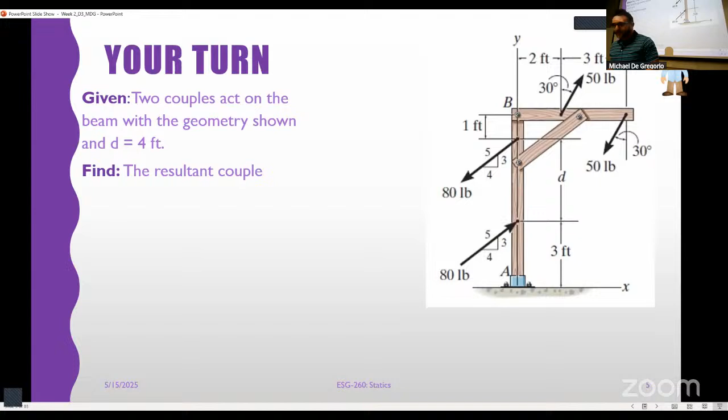That's weird because up until this point, we only ever found we had 1 couple. Remember, when they say 'the couple,' they're asking you for the moment specifically, right? We're looking for the moment, the resultant moment. Okay, so let's start with our free body diagram to get that rolling.

So I'm going to cheat and use these tools to help me make my frame here. That's true, use your tools, not cheating. Nobody said I couldn't use these zoom tools. That one's not going to work, huh? Okay, that's fine, good enough.

So we've got a point here, we've got a point here, one about here. And I'm going to put a point there. All right, well, let's start drawing some forces. I'm going to start with my couple that's up here.

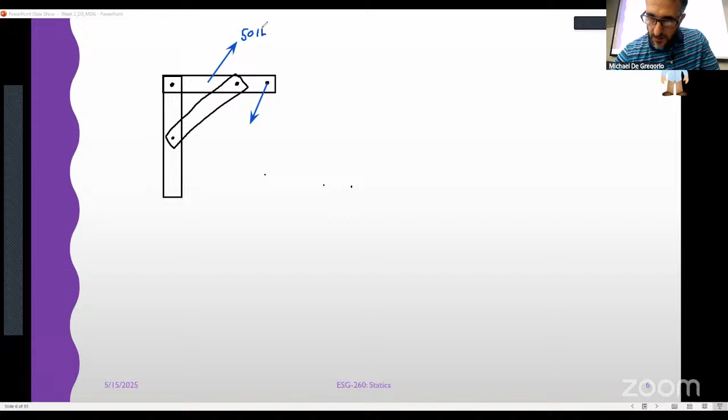There, so pretty good. What are those? Those are my 50-pound forces. This is 50 pounds. We are given this angle here as 30 degrees. I know that's not clear to see, but you'll see it on this one maybe. 30 degrees, right? So we're given this couple here.

We're given some distances that we'll write in a second, but let's get the other couple drawn on there as well. Okay, and so that one's going to be like here and here. What we were told about these specifically was that they are 3, 4, 5 triangles, right?

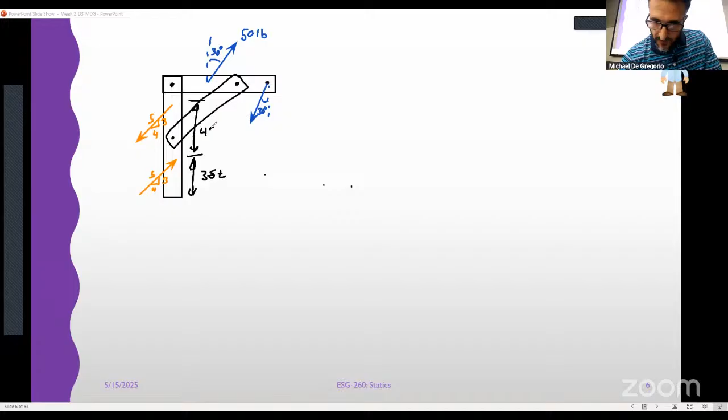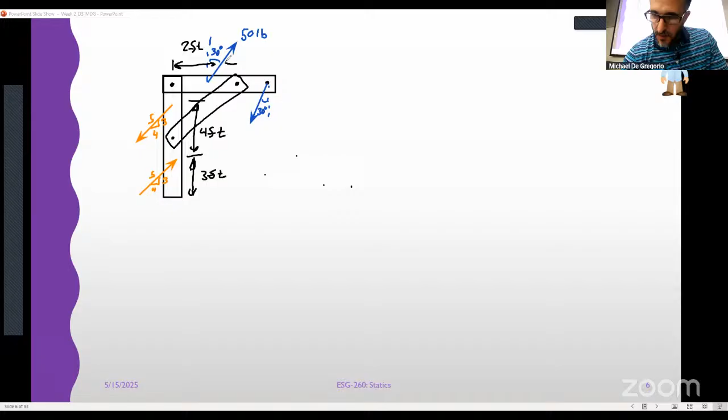Great, so we got all that, and we'll put in our distances now. We were told that from the base here up to our first force, that's 3 feet. We know that this distance here, from here to here, was given as 4 feet. Then from this point over to there is 2 feet. And here to here was 3 feet. And that should be it.

Anyway, we'll discuss whether or not this is drawn to scale in a minute. Let's start here. Newsflash, it's not. Okay, so if we go back just really quick and look, you can kind of see where we're at. This is 1 foot between point B and the top of that force, which is one that I forgot. So we'll go from here to here, 1 foot.

Okay, I think we've got all of our things in there. I'm going to adjust this just slightly because it's bugging me. It goes to the point of application, and this goes from there to there. Nope, no, we're just going to leave it. It's fine, there we go. Perfect, it's perfect now. Yep.

For the diagonal? No, it does not. We are told that our X and Y coordinates are there, right? So we're doing a positive XY like this, with rotations in that direction.

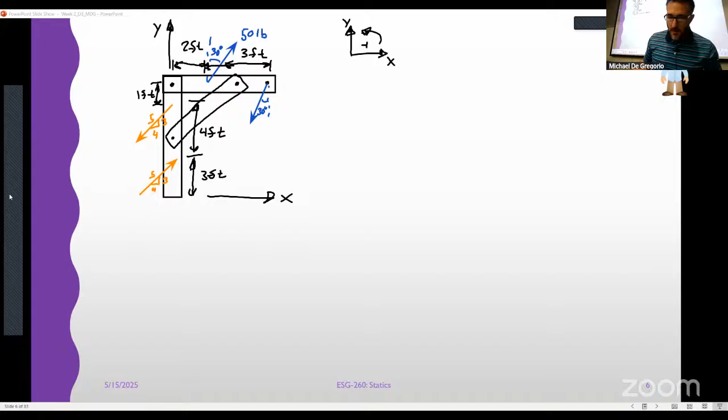Okay, free body diagram. What do we know? We know distances and forces, right? So we'll write it down. We'll say, just for completeness, what is known: distances and forces, or dimensions and forces. However, we're given this original drawing, right? And we created a free body diagram.

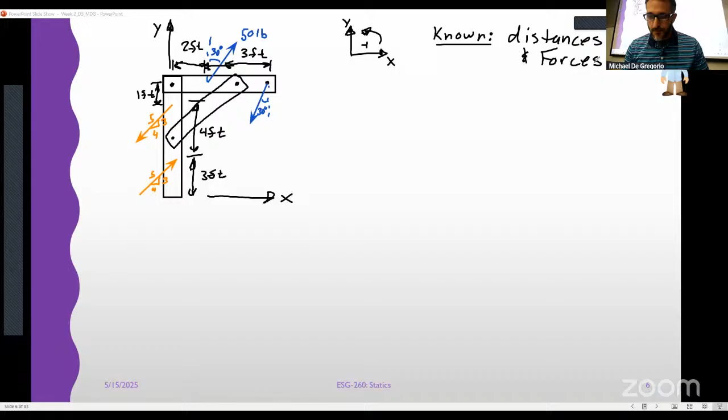What are we asked to find? The resultant couple, which I'm going to call M sub R, for resultant moment. And that's what we're looking at.

Okay, so we talked about this a little bit last class. There's actually two ways that you can kind of go after this, right? You can find the vector between the two forces, the R vector between the two forces, and then do R cross F to get your moments, and then find your resultant.

You can do that, and that's totally fine, okay? Why am I hesitant to do it that way? Mainly because that doesn't help me get the resultant. That helps me get two different moments that have different coordinate systems that I'm going to have to break down into X and Y components anyway to get the resultant moment, right? Because remember, the moment's a vector, so it's going to be a little bit messy.

But you can do it that way, and that's totally fine. What I'm going to do is do the trig up front. I'm going to break all of my forces down into X and Y components first. Then I'm going to find the moment due to each of those, and then I'll find the resultant. Six of one, half dozen of the other. You should get the same result. One is just a little bit more trig heavy, carrying those.

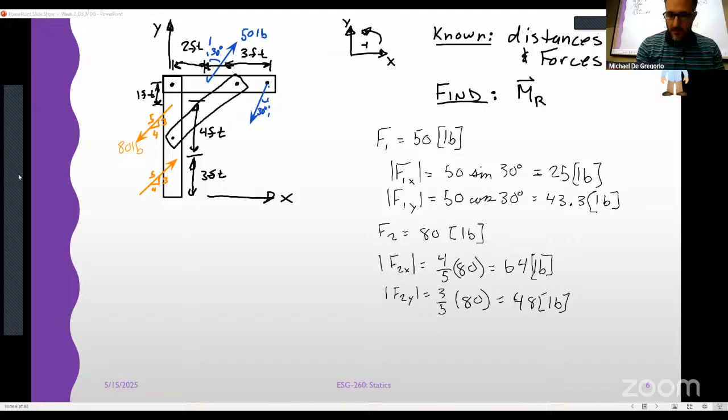Well, it affects how it looks by - I'm just going to change how we drew these real quick. You don't have to redraw them if you don't want, but I think it can be helpful, right? So let's try that again, but with the right color.

So we had one that was up and to the right, one that was down the left. Is that there? Nope, this one goes up. I'll move it in a second. Okay.

Once again, not drawn to scale, but just to show you guys what we've done, right? So by doing all that, we've broken our forces down into their X and Y components. Not crazy, it would have looked really cluttered if I kept all of the force vectors on there, right? But what's interesting about this, right?

All right, well, let's start off by finding the moment due to the 50-pound force - the 50-pound couple, okay? If we want the moment due to the 50-pound couple, doing this allows us to do some really interesting cancellations, right? So the moment due to the 50-pound couple is equal to what?

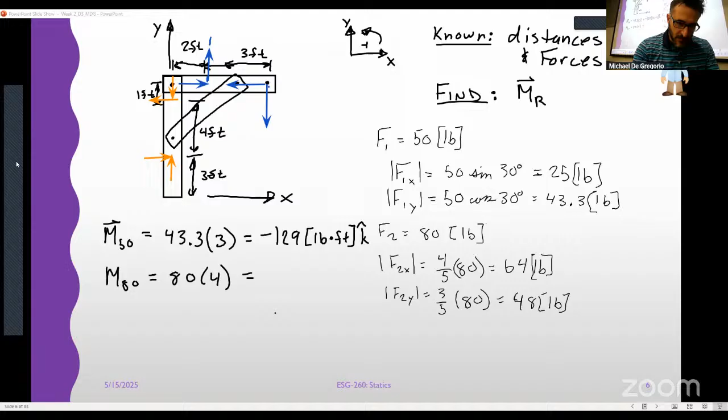We'll have 80 times 4. Okay, that should be, the last time I checked... well, sorry, not 80, 64. 64 times 4, which should give us 256

foot-pounds or pound-feet. Is that positive or negative, that rotation? So I've got my thing, I'm going to pull like this. Is this positive or negative? I guess for you guys it'd be this direction, right? Yeah, it's positive. This one's positive. We'll call it out in the K.

We've got our, hey, look at that. We've got 2 moments in the K direction. We need the resultant moment. What's the best way to find the resultant moment? You should just add them. Okay, great. So the resultant moment is 256 minus 129, which comes out to like 126, 127. Right.

And I'm going to switch this one and call it foot-pounds because reasons. And there you go. And where do we put this? It doesn't matter, it's a free vector. Here is my moment. There you go. Boom. MR. Vector.

Right? Okay, why is that important? Well, we haven't said why it's important for us to be able to understand what the moments are. Well, I kind of did, right? So again, this is statics. So if these applied forces create this moment on this frame, right? Why is it important that I know that? It's important. Whoa, man, I'm gonna die here today.

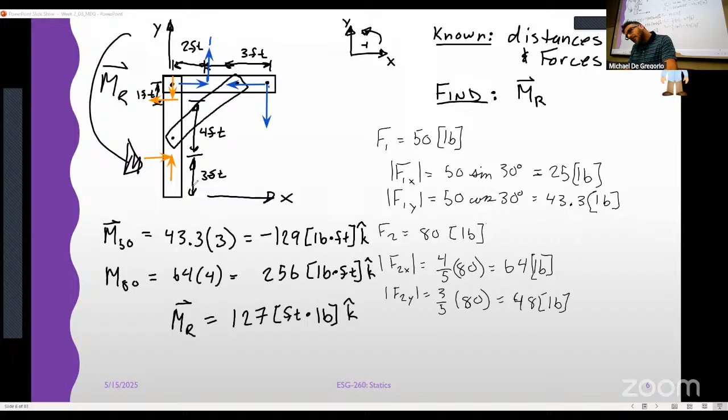Yeah, Colin, so. Right, so remember when we're dealing with couples, what's the idea with couples is that we need to know the distance between the two vectors that we're making a couple, right? And because those have the same line of action, the distance between them is zero. Because remember, you can move a force anywhere along its line of action and still have the same effect of that force, right? Like the truck pushing the thing that we talked about last class.

Yep, cool. Any other questions? These are good. No. All right. Cool, all right, so let's see.

Then you're going to put it on the whiteboard when you have your answer.

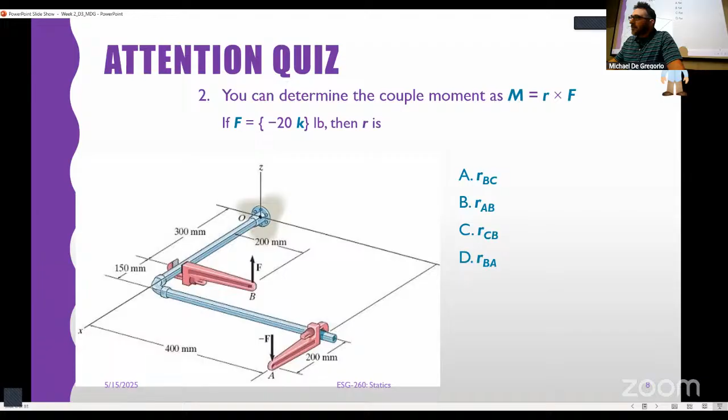So you got to use the 150 and the 200, and then 200 over - you got to do all sorts of SolidWorks math, dimensioning. It's a dimensioning problem.

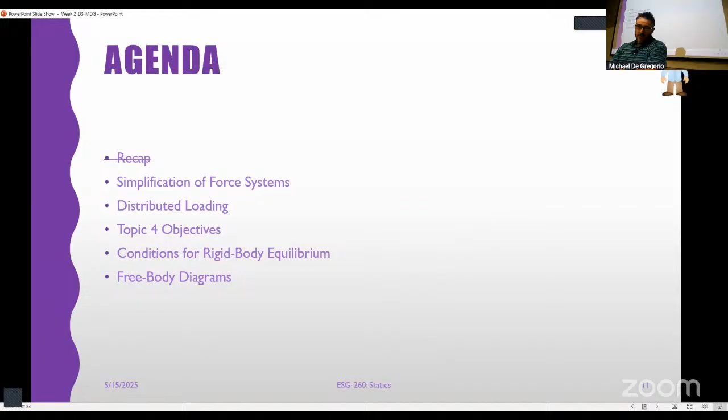Simplification of force systems, that sounds interesting. It is, you're right. I mean, that's also a rude question. Okay, and I don't appreciate that. But there is a method to our madness of what we're trying to do.

We're trying to build the foundation still. You have to think about this, right? If you were taking this in the regular semester over 15 weeks, we're already like 4 weeks in here, in our 2 weeks. And people that take this in 15 weeks, at 4 weeks, they're just looking at cross products and how to move moments around.

We're doing great. All right, back to our puddles of water or blue potatoes or whatever we're calling them. I have a bunch of forces acting on a thing, and that seems really complicated. I would rather have one force and one moment. That seems much more manageable to work with.

So when I have a number of forces and a couple moment, being able to identify couples is nice, because then you can reduce it to a moment, and you might have a resultant and a moment, right?

So we can make two force and couple systems that are equivalent systems. Remember, they are equivalent because it is the same net external effect on what we're looking at. We can regroup forces and moments in whatever way we want, as long as we don't change the net effect of having those forces there.

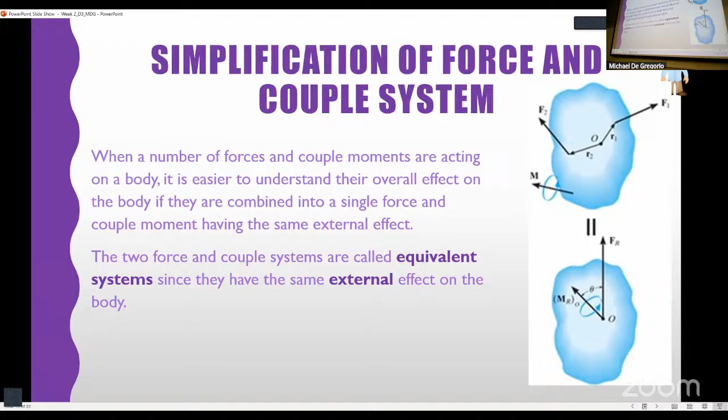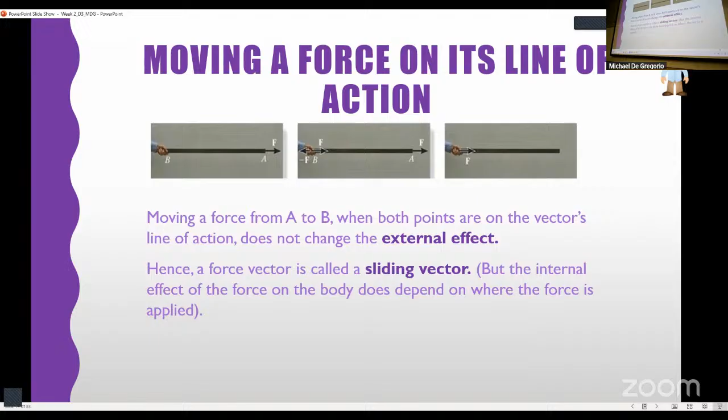When a force is moved but not along its line of action, that's an external effect you have added. If I move this vector somewhere not along the line of action, let's say to the very top instead of the center of that meter stick, what happened? Now I have to do some more work. I can do that, but I have to take care of the net effect I've created, which means I have to add in a moment that will counteract the net effect of moving the force.

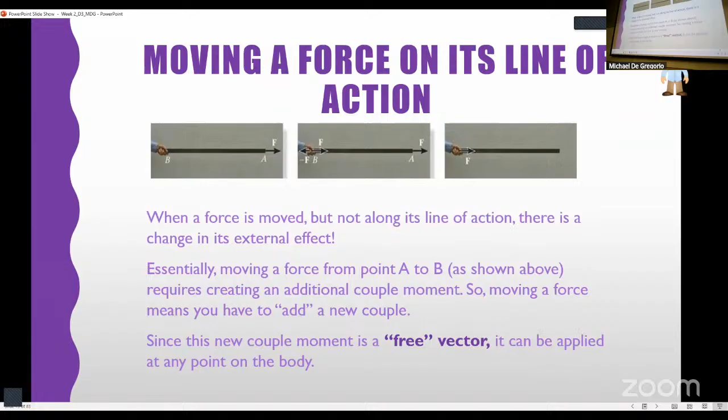That is a free vector moment, because you've essentially had to create a couple to take care of that. So in this case, it's weird, but we'll show some other examples.

So we have several forces and several couples, right? We can move them to a common point. Let's say it makes sense for us, like I've got all these things acting here, but I would rather consolidate them all to be at point O, because point O makes sense to me. I'm able to put my instrumentation at point O, right? Maybe there's some reason why point O makes sense for me to move this here.

Maybe I want to move all of my forces to the hinge on the door. In order to do that, I need to create a bunch of moment couple systems that I can then consolidate into resultants. Notice we had a moment applied down here and our forces - this generates two new moments when we move these things, because they aren't along our line of action. By me moving the force, I've created an unintended moment that I need to counteract.

How do we do all this? That's just telling us how to find the resultants, right? And that's fine, we know how to do that.

So if we're talking about a two-dimensional system, 2D, we've got these things lying in the XY plane, and we reduce their equivalent system. We can obtain that using the following three scalar equations. In 2D, we can use these equations, where MC is specifically any couple moment that we produce, and MO is the moment about point O.

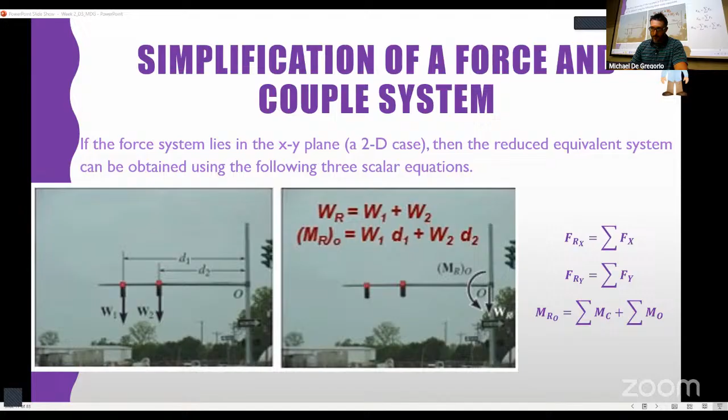Okay, in 3D this gets messy, as is typical for adding the third dimension. If FR and MRO are perpendicular to each other, then the system can be further reduced to a single force FR by simply moving FR from O to P. So if we have something that's concurrent, coplanar, and parallel, then we can always reduce it to a single force.

So then we can move everything to just one spot. But look what happens, you can see it here. This is the new force resultant. I took all three of these - they're concurrent, coplanar, and parallel. They all exist in what we're calling the XY plane, or the AB plane, whatever you want to call it. If I move these all to point O, that's great...

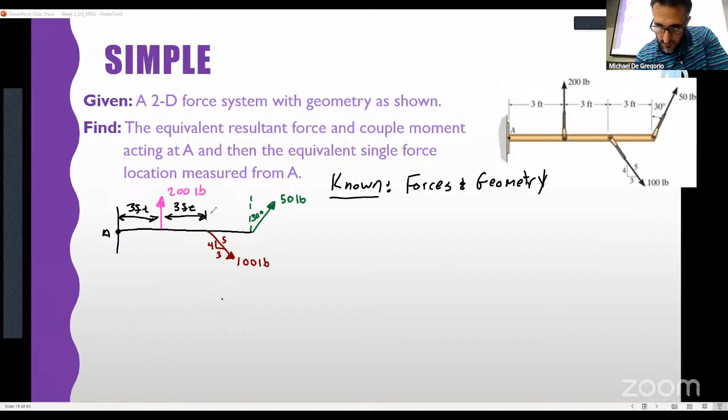And we'll do our coordinates in this way. Okay, cool.

So what were we asked to find? The equivalent resultant force and couple moment acting at A, and then the equivalent single force location measured from A. So there's three things we're asked for here: we want the resultant force, we want the resultant couple, and then we want to know if I just simplify this into a single force, where would I put it?

So we're going to say we want FR for part A. For part B, we want MR. And for part C, we're looking for the distance, we'll call it D sub A. That is what the problem is asking us for. And I would say that based on the things that we have, we should be able to do those things, right?

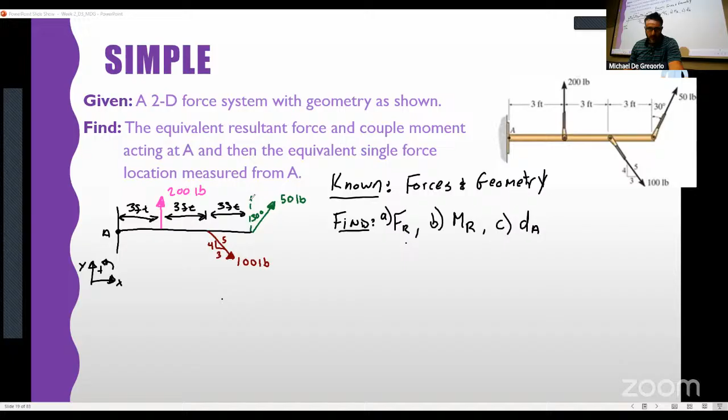So let's do that. Let's do that here.

So the first thing we want to see is we want to try to figure out what FR is, right? And you can see our drawing up there shows that FR is somewhere over there. When we combine all of these, we're going to end up having some new force vector, and the distance that it is along the beam is going to be affected by how large each of the components that we have is. Since the 200 pounds is the largest component, you're probably going to skew towards the 200 pounds, right? But let's do the math out and see what happens.

First thing, let's break down our forces and find the force resultant, because part A was to find F sub R. So if I'm going to find F sub R, I need to know all the X and Y components of all my forces. Let's do the easy one first. We'll call it F3, which is 200 J pounds.

That one seemed pretty good, right. Okay. You could also call that F3Y, or you could call it whatever you want. I like to have a variable name for it because if I just write 200 in the J, I can't track it, so I just create a variable name for it.

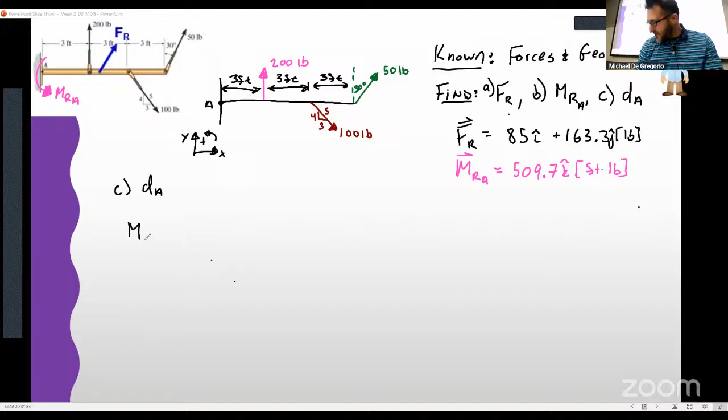Well, recall that in 2 dimensions, using this scalar equation, a moment is the force times the perpendicular distance that force is away from the point we're taking the moment about. So what we're looking for is what we're calling dA here, that distance between A and where that force comes off of the bar. That's what we're looking for.

So in our case, moment at A is equal to FR times dA. That's the equation we're going to use. And if we want to solve for dA, it's the moment divided by the force. If we look at the units, that would be foot-pounds divided by pounds, which gives us feet. So hey, that's great.

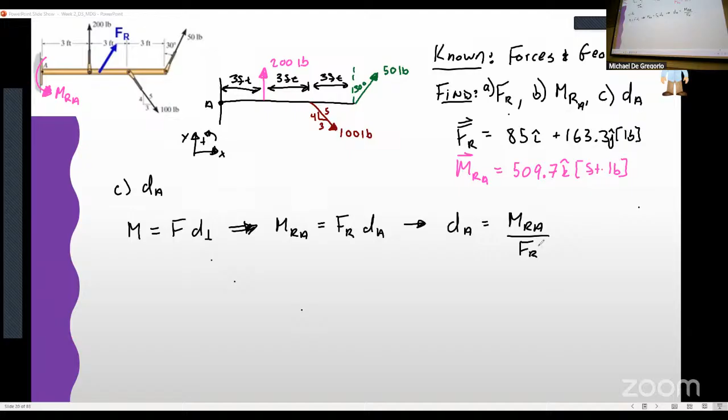Okay, so what do we do here? Let's look at FR. FR is at an angle. We've got to figure out where to put FR, how much moment is produced by FR. If I broke it into just the y component, because the x component goes through point A, I really just need this 163.3.

So dA is equal to the moment that we found, which was 509.7 pound-feet or foot-pounds, I accept both, divided by 163.3 pounds. Units cancel, we're left with feet. dA is equal to 3.12 feet, and that's how we do that.

And so this whole thing can be represented, without us needing to deal with this moment at all, as long as this force is placed the distance dA away from A. So we go down from 3 forces to 1 force. That is the one, if we apply that 1 force in that spot at that angle or in those components. Great success, 1 force.

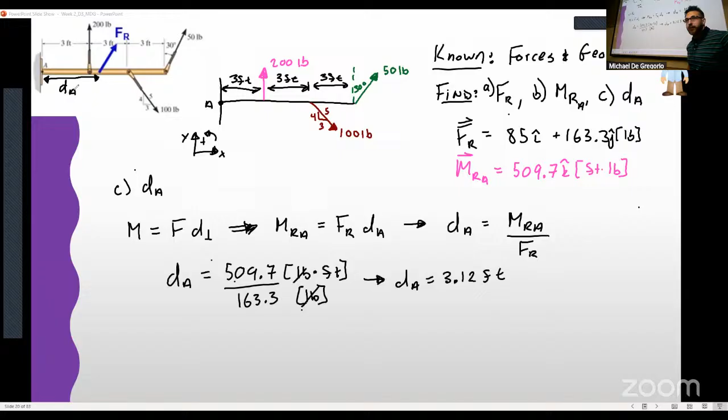I would also say that when you get to something like, I don't know, maybe the space shuttle or something that has an extremely difficult truss you want to look at, like any building that exists, you probably want to break it down to individual components when you have a lot of forces on it. Some of these are somewhat trivial, but we have to start somewhere. Start simple, and then we'll move to more complex stuff.

Guys have any questions about this? It is a useful tool, I promise. Are you going to use it all the time? Maybe not. But when things get really complicated and there's a lot of forces and moments acting on things, it really does help to be able to consolidate them and move them around to where you want them to be.

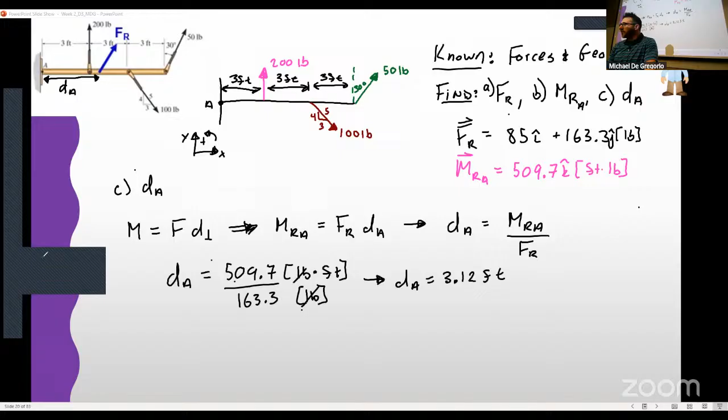Okay, here's a question. The forces on the pole can be reduced to a single force and a single moment at point, is it P, Q, R, S, or any? And you're going A, B, C, D, or E. The forces on the pole can be reduced to a single point force and a single moment. Where?

This one's a tricky one because it's three-dimensional, guys. You can see its X is coming out of the board, so it's tricky. Okay, we got A, C, E. E, is that a squared? Does that say E squared? It's actually secret answer F. No, it's E, it's E.

Any of these points, that's the whole point of what we just did. You can take all these forces and, if you want to put it anywhere, you can. You just do the math to figure out what that looks like. We can put it wherever we like. Wherever we like.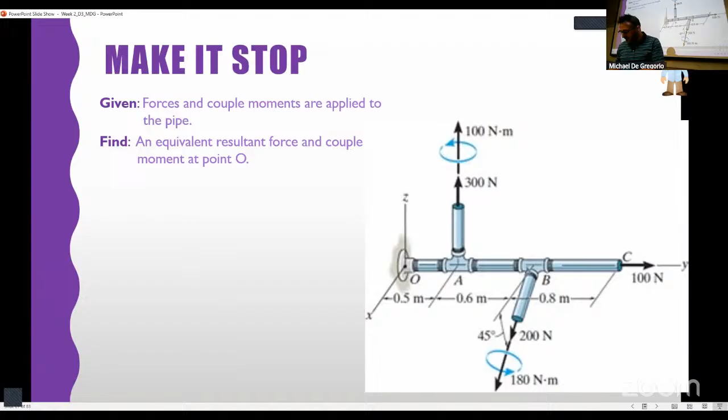An equivalent resultant force and a couple moment at point O. So we want a resultant force and a couple moment, specifically at point O. So we're being asked for two things: the resultant force and the resultant moment. Okay, great. Let's draw this, you guys still have it up here.

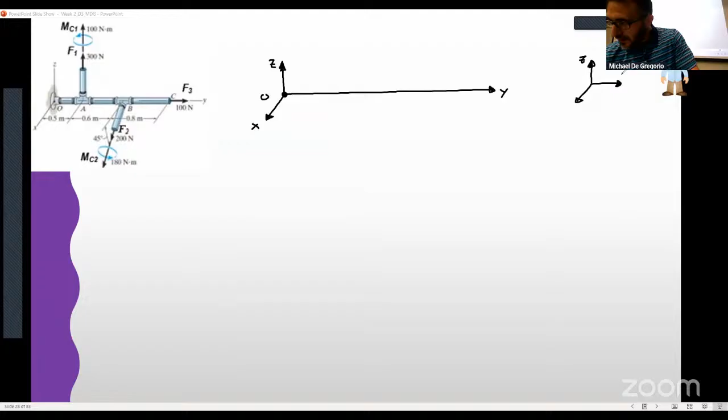There's a lot going on here. I'm going to try my best to draw this super accurately for you guys. So let's start here. There's my pipe, here's point O. X, Z, and Y coming out over here. Just to remind myself, I'll also draw my coordinate system independently, Z, Y, and X, with the positive sense of rotation in each of my planes. Why? Because that seems like a good idea just to keep it in my mind.

Okay, let's draw our forces here. This will be point C, and here's my force. It is 100 Newton, and we're calling that F3. So I will call that F3. We've got some force here at point B that we're going to call F2, and F2 is 200 Newton. But there's also a moment around here that we're going to call MC2, and I'm not going to write it there because it's going to get cluttered.

We'll put our dimensions in a second. And then finally, we have point A. We have a force there, and this is F1, 300 Newton. That comes with a moment that we're going to call MC1.

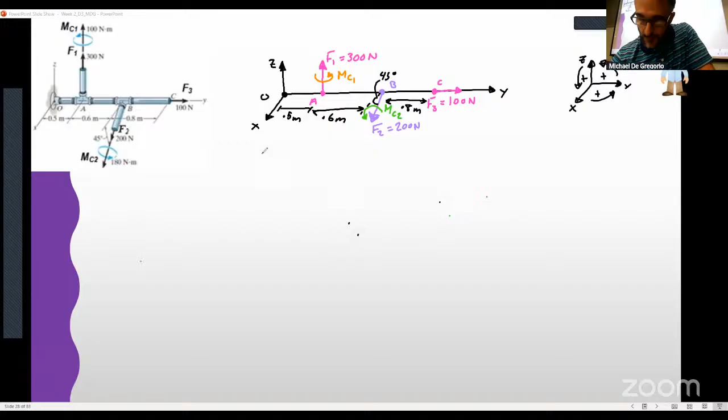That looks really complicated, right? Okay, what do we know? Well, we know F1, F2, F3, MC1, MC2, and dimensions. We have all those things, and we were asked to find two things that I'm going to label A and B, the resultant moment and the resultant force.

Okay, since we asked for the force first, let's do that thing. Let's do the force first. So part A, resultant force. Well, this one should be pretty good, as long as I define all my vectors for F1, F2, and F3, right? I should be good to go.

So let's start with some of the easy ones. The F1 vector should be what? Well, that's only in the z direction, right? So it's 0i plus 0j plus 300k Newton. Great. About F2, that one's a little bit more tricky, right?

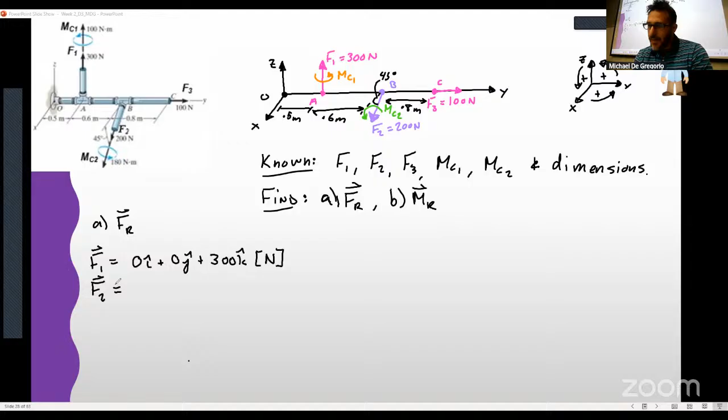That one's down at an angle off of the XY plane. So that's going to have a z component and an x component, right? And only a z component and an x component, because it's not angled. We're not given any angle in the y direction, right? So it's just angled downward. So how do we figure that one out?

Well, it's going to be in the x direction, right? So it's going to be 200 times some trig function. Which trig function should I be using? It's a trick question, but it's true: it is sine 45. It doesn't matter because it's 45, you can pick whichever, you'll get the same answer, right?

Is that positive x or negative x? Is it coming towards you or into the board? Towards you. Which way is positive? Towards you. If this was a 3D movie, you'd be like, no, 200 newtons, no. Okay, great, perfect. You guys are like, what the heck is going on? It's nothing happening in the J, right? There's nothing happening in the J. This is an XZ plane force.

How do I know that? Because I'm only given the one angle. That's it, I'm given the one angle, and it's just tilted downward. If it was going to be off to the side, if it was angled to one of the sides, they would have to let us know somehow. They don't. Oh, I don't know, it is cosine. Yeah.

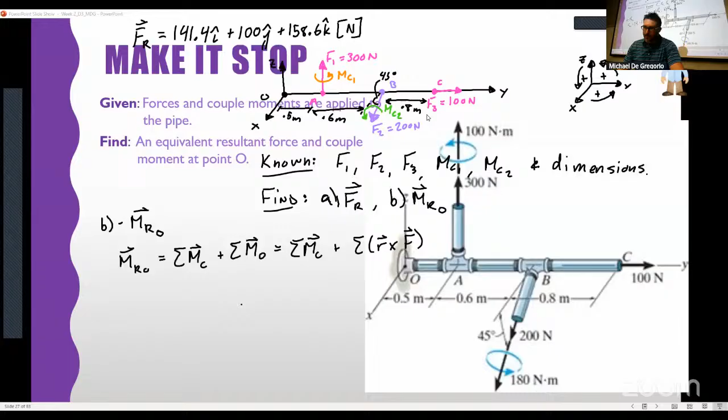And those were given to us in the problem. So if we go back to the original, you can see on this you have these moments—we call them couple moments here, but think of them as any moment that's externally applied to the system. So for some reason this pipe's being twisted, and so is this one in some way.

Without context it's tricky to understand, right? So let's do the easy part first, and we'll write down our MCs. So MC1 is equal to what? Well, that's purely around the z-axis—everybody can see that, would everybody believe that? So if that's purely around the z-axis, we end up with 0i plus 0j plus 100k Newton meters. Okay, great, that one was easy.

MC2 is not that bad—we just need to figure out the components of it. And so how do we do components? Well, we're going to need trig functions, but we know that the magnitude is 180. This is down in the xz plane, so this is going to have a moment about this vector, because it's angled downward like that and it's about the xz plane. It's going to have a moment in the x direction and a moment in the z direction. Nothing in the j because it's not tilted in that way.

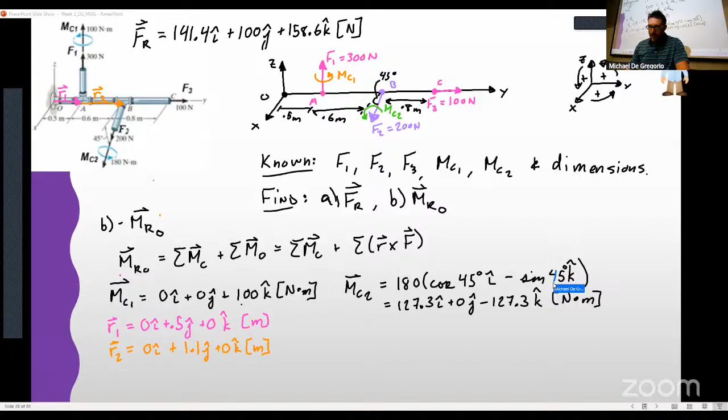Now we need to do our cross products for this, right? So I'm going to clear some space up here. Is everybody cool with what we've done so far? Everybody good? Any questions right now?

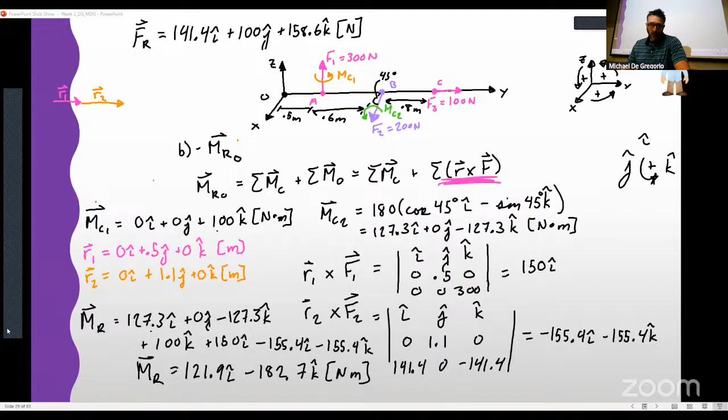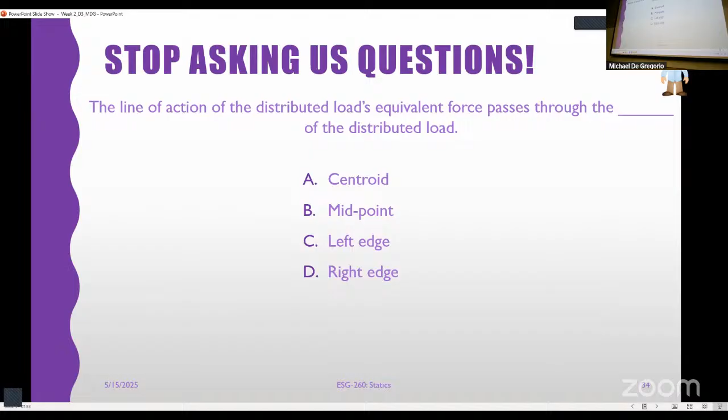All right, centroid is, think of it as—I don't want to call it the center of mass, sometimes it lines up with the center of mass, sometimes it doesn't—but think of it as where you're concentrating all of the geometry of the shape. Think of it that way. And we'll talk more about it in a minute.

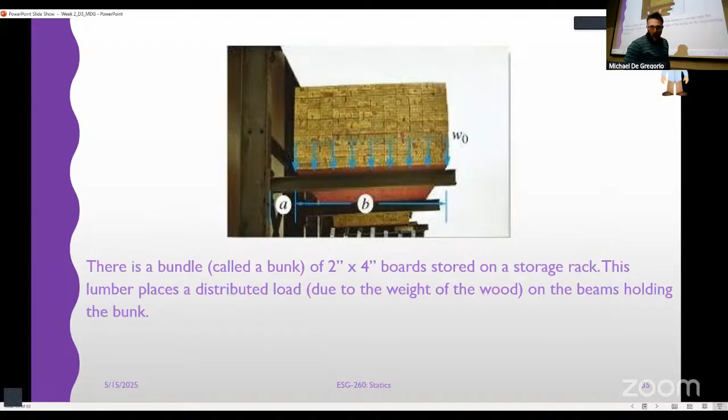Okay, why do we care? Okay, so say I got to stack this plywood. We're going to call it a bunk because apparently, as I learned, that is what this is called. A group of plywood is called a bunk. This is a bunk of plywood. Amazing, right? So, bunk.

All right, it's 2x4s, stored on the storage rack. The lumber places a distributed load due to the weight of the wood on the beams holding the bunk. So this isn't a point load, right? It's not just one point of contact. There's a whole loading distributed across from A to B, and it's pretty uniform. You can't really see it, but these blue lines indicate that that's a rectangular distributed load.

Okay, great. What other quantities do we normally use? Let me ask you this - it's an impolite question, but how much do you weigh? You don't have to answer. Where is that located? Is that a point force? No, that's your distributed load. But we all will tell you that acts from the center of gravity of your body, which, if you were to cut off your leg, that's going to change your center of gravity. But that leg still has weight.

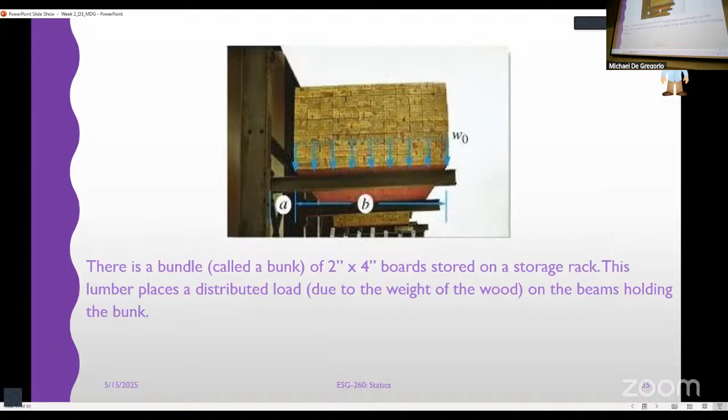Anyway, to analyze a load's effect on a steel beam, it is often helpful to reduce a distributed load to a single force. How are we going to do that? It ties into that question we just asked - what's the area under the curve? This distribution is typically given in Newton per meter or Newton per meter squared, so if I multiply by the area, I would get back to newtons.

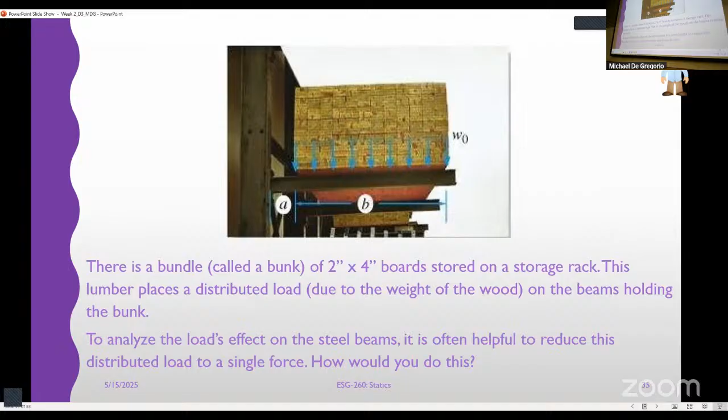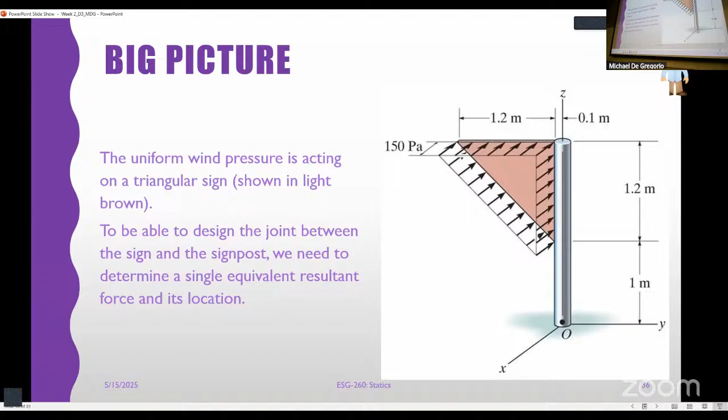Here, I've got wind blowing on this sign. It's a triangle sign, and it says it's brown, but I don't believe that - but that's fine, maybe it is. I've got uniform wind pressure acting on this sign. If I want to figure out the net effect of that wind pressure on the signpost, it's a lot easier to condense that into a single point loading. This is why we were so concerned about whether we can move these vectors around wherever we want - how do I consolidate and simplify these force systems? Being able to consolidate them here is really helpful.

So if you look at this, the units of our distribution are force per length. Think about it if it's a rectangle - what's the area of a rectangle? Length times width. If the length is in meters and the height is in Newton per meter, when I multiply those together, I get newtons. It all comes down to a units problem at the end of this. So if you don't remember that this is supposed to be the area under the curve, the units should help you when you look at the distribution. How do I isolate the force? Well, I need to multiply by the distance.

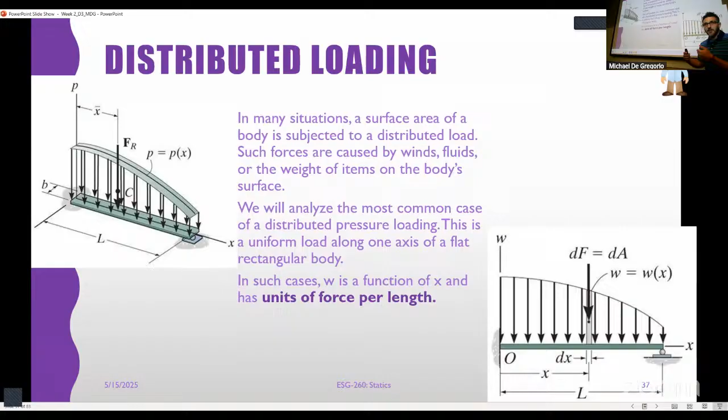Now, a lot of these - we just kind of talked about this. You have to find the centroid of the shape, and that's where it's acting. You'll see this notation quite a bit - they call it X bar in the book. So I can reduce all of this down to a single force acting some distance X bar away from some point, in this case, point O.

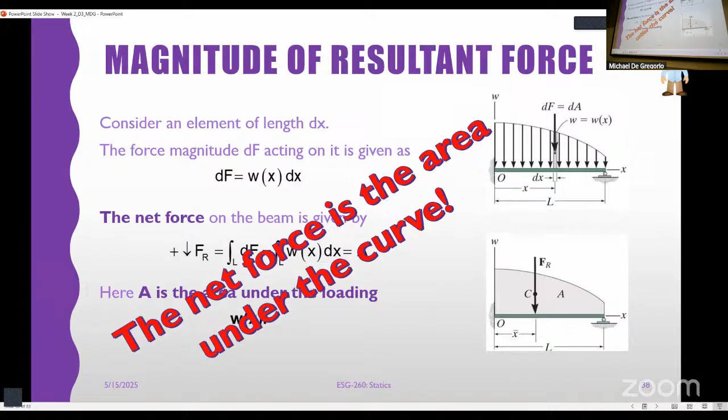We're not going to go through the whole derivation. The point of the fact of the matter is that the net force is the area under the curve. The nice part about this is that for most geometries, those areas are known - there are known formulas for them. We'll talk later in the class about moments of inertia and how you can calculate all the centroids yourself using double integrals. But for right now, it's area under the curve.

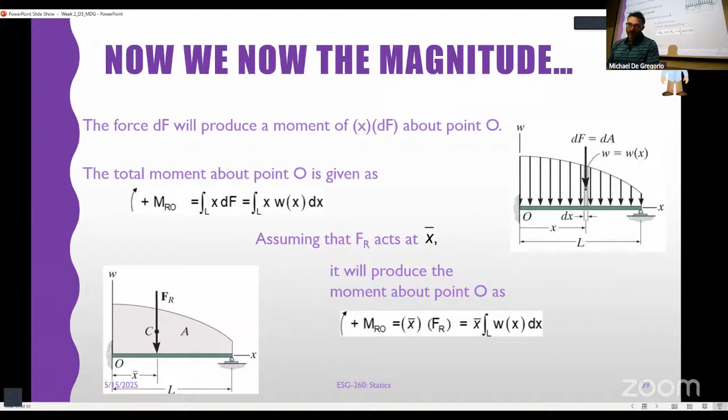How do you find the magnitude? Well, now that we know the magnitude, how do we find the position? You take the moment - it's what we just did before. I found this magnitude resultant force, and it's going to create some moment when I condense it. What is that distance away that I need to put it so that we don't have to write the moment on there? Same deal. But where is X bar? It's there - it's easy, just do those integrals. It'll be fine.

We'll talk about it in more detail later. But for right now, point C is what we call the geometric center or the centroid of an area under a loading curve. Sometimes you'll see it drawn as a circle with an X in it, colored on the diagonal. It's fine, don't worry so much. You can find the integral of x dA divided by the integral of dA, all along the area, along the shape of the curve.

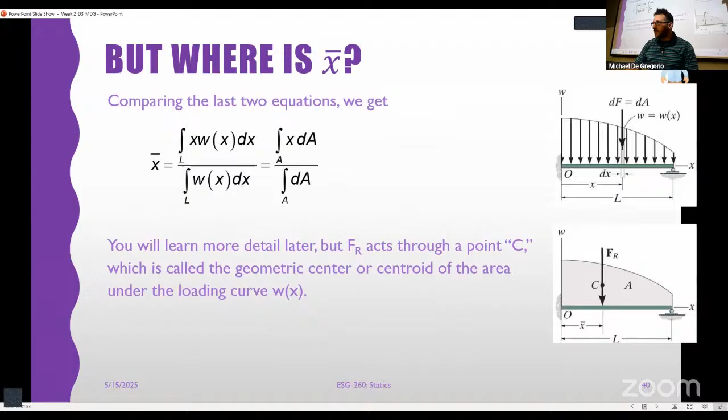We can do that, but until we get to that point, we're going to consider mostly rectangular and triangular loadings. I say mostly, this says only. It's going to be mostly. Okay, mostly.

There's tables in your textbook that give you all of the locations of the centroids for all of the things, and in practice, you would never memorize any of these. You're just going to go and look it up. Again, some of them you will use so often, like rectangles and triangles, that you just know it, and it's burned into your brain forever. When scientists look at your brain after you pass, they will see the secrets of distributed loadings in there.

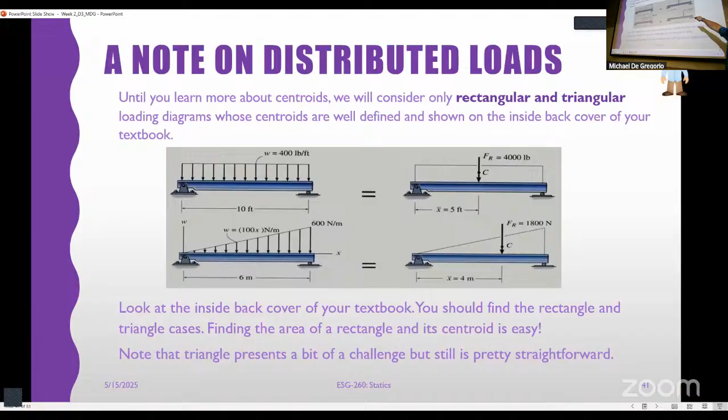Now let's complete the calculations to find the concentrated loads. I've got these two concentrated loadings here. I've got this rectangular distributed load that has a distribution of 400 pound per foot, and part B is this triangular one that has 600 Newton per meter applied over 6 meters.

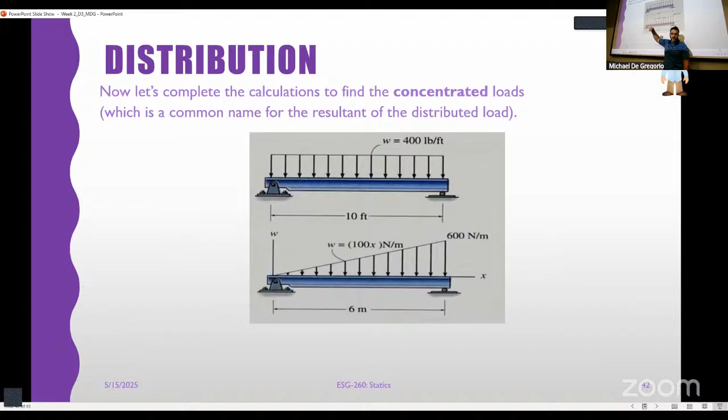Before we get into any of that, notice this says 100x Newton per meter. So the slope of this line is 100 Newton per meter, or 100 Newton for every meter. That makes sense? Normally when you're given the triangles, we don't really care about this, we're just looking for this number. You're going to be given the maximum magnitude of that triangle. But if I were to cut this beam here and it was 1 meter long, the top of that triangle is only 100 Newton per meter.

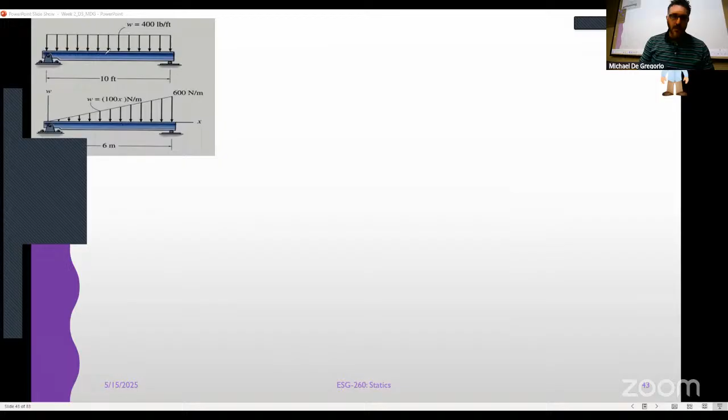All right, so let's start with this. We want to calculate, we want to figure out where this thing is. You guys can look at your textbooks if you want, but we're going to start with the rectangular one. I'll draw a little diagram here. What do we know so far about this? We know a couple of things.

The magnitude of FR for the rectangle, or resultant — the resultant for this is not a vector, it's just the magnitude. What is it? Well, you said it was the area under the curve. Because that's what it is. So how do we do that? Well, that's a rectangle, so that's going to be 10 feet times 400 pound per foot, the length times the width. So we should get 4,000 pounds — area under the curve.

Great. Is it that easy? It can't possibly be that easy. You were just talking to us about doing cross products and moving moments to God knows where. And yes, it is that easy. This is how it goes: it's the area under the curve. You know what the curve shape is, you find the area.

Where does that go? It goes at the centroid of the shape. What's the centroid of a rectangle? It's the middle. FR at 5 feet. Mic drop, done. Mind blown, cue all the GIFs, the memes. You guys know what I'm talking about. Exactly. All right, great, that one's super easy.

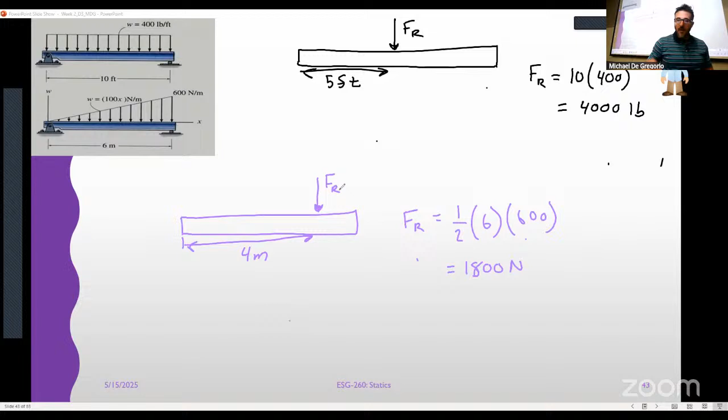And turns out for a triangle, that pushes it to 2/3 from the skinny end, which would be 2/3, 4 meters from the skinny end, or 2 meters from the other side. Which side you want to calculate it from depends on what the question is asking you and all of those things, but that's generally how it goes. So pretty straightforward, right? Not too bad. We can all do that.

So, questions about how to locate rectangles and triangles. What if I don't have a rectangle or a triangle? Well, then you look it up in the back of your textbook where it told you to look it up. There's also this thing called Google, that not a lot of people are using, that you can ask for that sort of information. And Dr. ChatGPT probably knows the answer too, but sometimes he makes stuff up because he wants to be relevant.

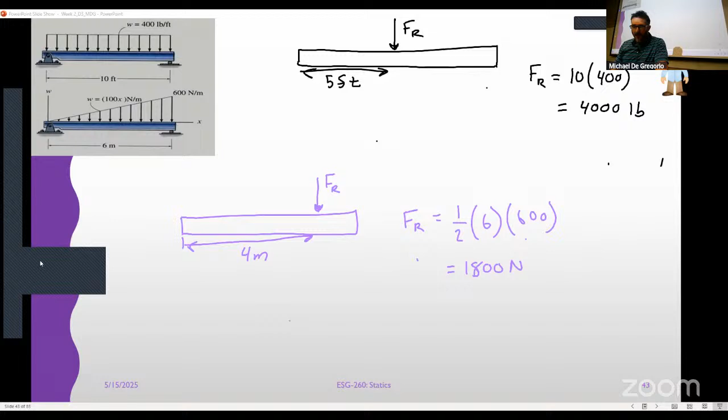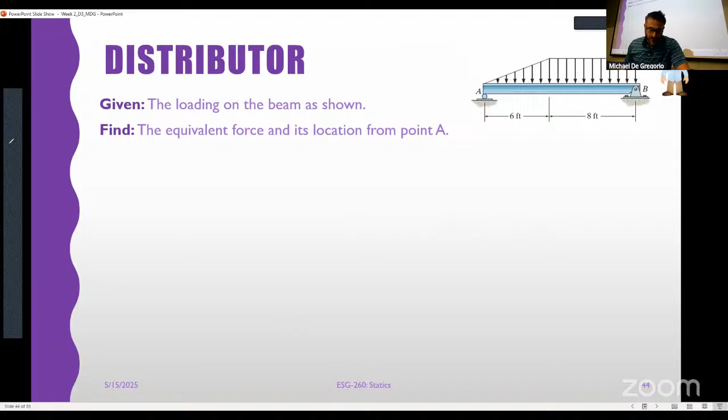Okay, so this takes into account all the things that we were just doing with simplifying force systems, right? So if I draw my really expert free body diagram here, where this is point A and this is point B, let's start with the triangle. With the triangle, I've got this, right, and this is going to be 6 feet. And then I'll draw my, just for completeness, that's 8 feet, right, from here to here.

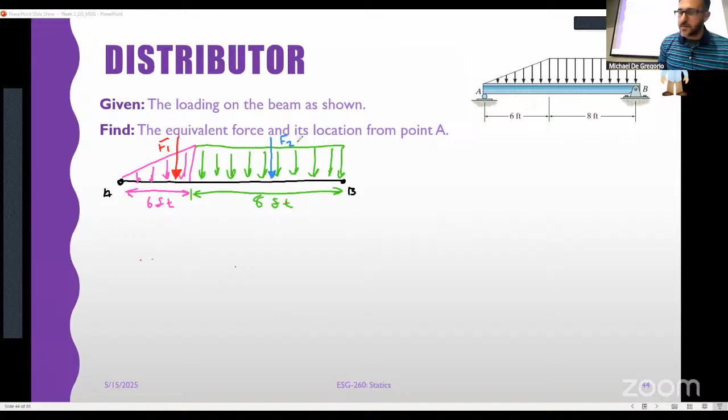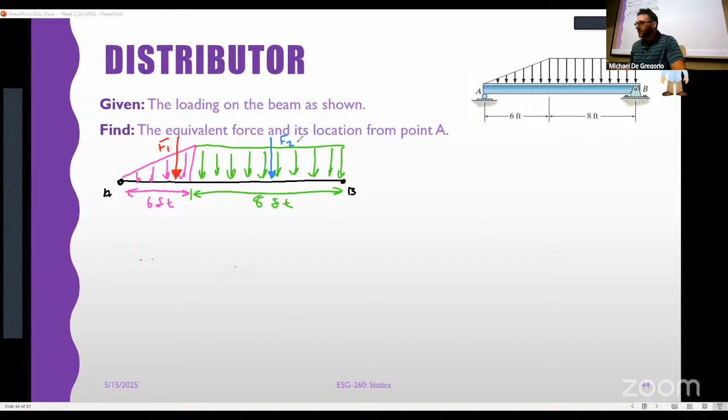There's 8 feet from here to here. Okay, so I want to start here. I know, like we just did this, right? I'm going to call that F1, and we're going to call this other guy here F2. Now that's crowded to look at, I agree, but I'm doing this on purpose just to show, right? So we need to find the magnitude and the position of F1 and F2, right? We already know the position, kind of, right? Because we know that it's a triangle, so it would be 2/3 across from A, and we know that F2 has to be the center of that rectangle, right? Let's get the magnitudes first.

So F1 should equal 1/2 of the base, which is 6 feet, times 150 pounds per foot, right? Which should give us 450 pounds. The distance to F1 from A, right, is going to be 4 feet because it's 2/3 of the way from A, right? So, is everybody tracking with me? I know this is going pretty quick compared to other stuff, but is everybody cool? We cool so far? Yeah?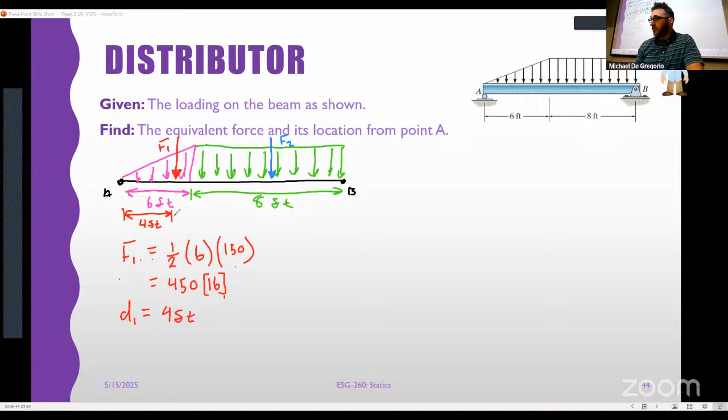This means that we're left with 2 feet here. And you're like, that, I know that. You don't need to tell me that. And it's not for me to tell you that. It's because later we're going to need that 2 feet. And I don't want you to forget about that 2 feet because the 2 feet is going to be pretty important.

F2, well, that's going to be 8 times 150, which gives us 1,200 pounds. And the distance to point 2 is going to be 4 feet from there. But we're concerned with it from point A, right? So it's 10 feet. Why are we concerned with it from point A? Because we were asked to find the equivalent force and location away from point A, right? That's what we were asked for.

So we need to create a resultant force. How do we do that? Well, we're going to add these two forces. They're both in the J direction. Makes sense, we just add them. Great. How do we find the distance it is away? So what happens, right? We did this earlier, right? What happens when we have two forces that we then create a new resultant force from, right? So we started with a distribution of force and I consolidated them, right? So the net effect of both is still preserved. But then if I create another resultant from those two forces, what happens?

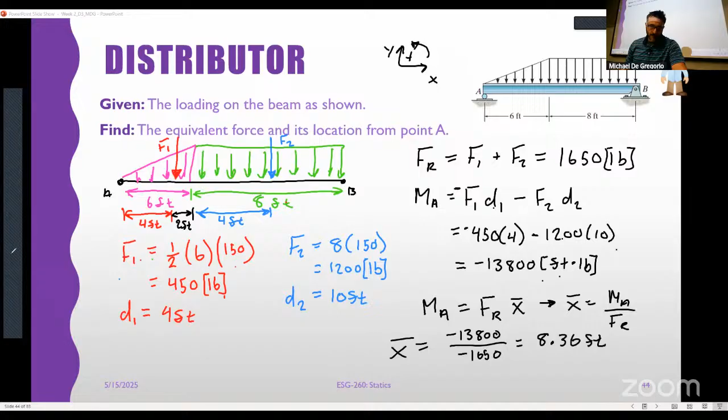Yeah, let's see. Here they are. 8.36 feet right there.

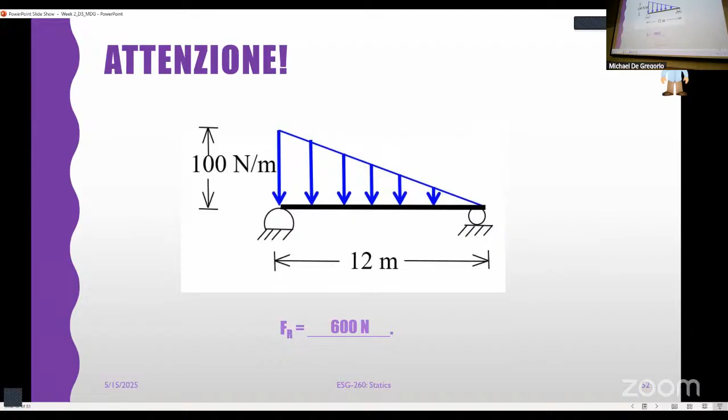Why is it 600? Half of the base times the height, one half of the base times the height. Where is this located? That's the next question. Where is this located?

Make sure to include units, please. Place. Okay, we got...

The answer is 4 meters, 4 meters. It is 1/3 from the fat end. That was a tricky one because all the other ones we did were 2/3 from the skinny end. It still is 2/3 from the skinny end, it's just reported from the fat end. Ooh, savage. All right.

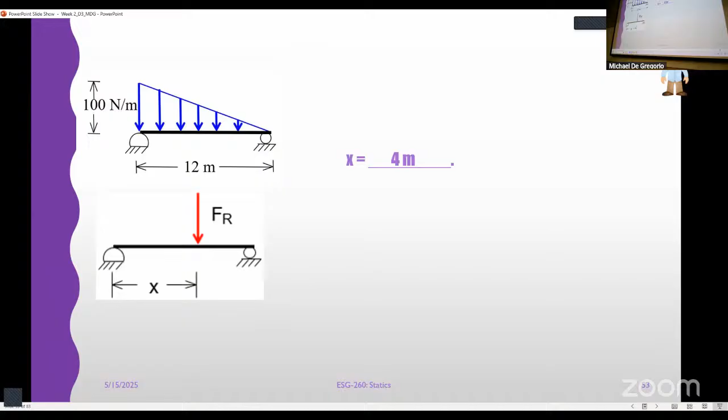I'm going to introduce topic 4, then we're going to call it a day, probably in a second. I've got 10 more minutes and we're going to use them. All right, topic 4. This is the second topic for the next quiz, right? 3 and 4 are quiz 2. This is analysis of trusses, frames, and machines.

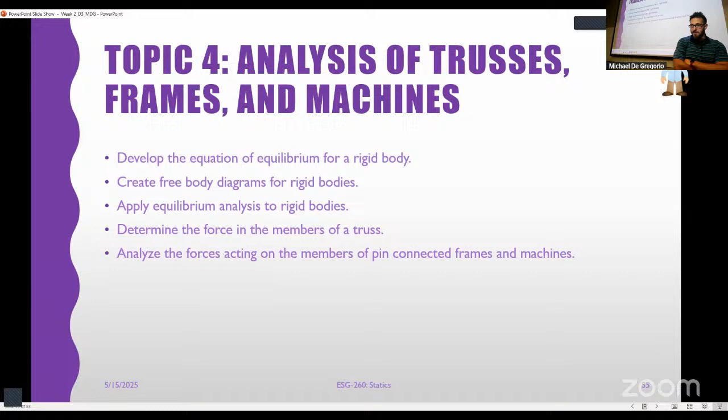This is where we're going to hit some actual statics, as it were. So we want to be able to develop equations of equilibrium for rigid bodies, create free body diagrams for rigid bodies, apply equilibrium analysis to rigid bodies, determine the force in the members of a truss, and analyze the forces acting on members of pin-connected frames and machines.

So, conditions for rigid body equilibrium. Okay, this is a beam and the cable, and we're going to say that we have frictionless pulleys that are also massless, and it supports an 80 kilogram load at C. Here is the question: how does this beam stay up? It's obviously changes in density, like we talked about earlier in the week, right? But for serious, how is this staying up? What is causing this to stay in that position?

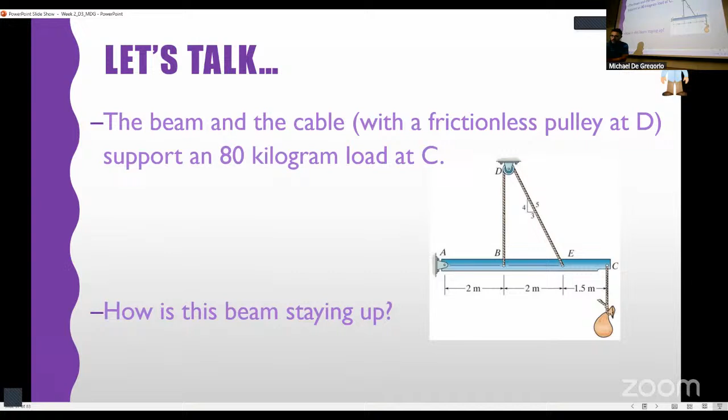A reactionary force, sure, right? This pulley up here has to be doing something, it's not free floating, right? And what Colin said is right - there's a reaction here holding the pulley in place. We call them reactions. Reactions prevent motion, okay? That's what they do. That's what I want you to think about when we talk about reaction forces.

It's not an actual force that's - let me be careful on how I say this - it is how the environment is reacting to your object, your system, to create static equilibrium, which is why we call it a reaction, okay? So how does this beam prevent rotation, right?

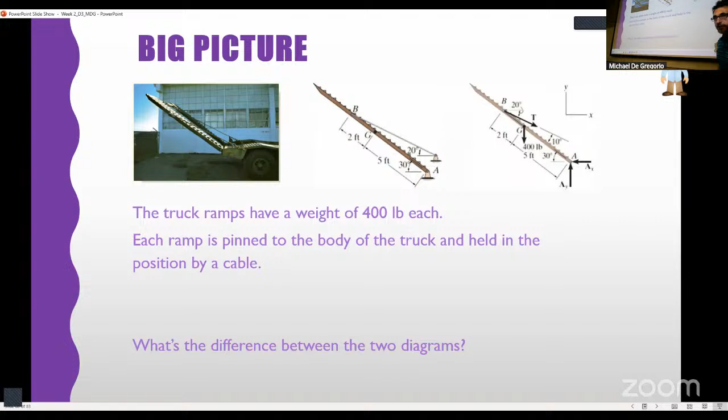If you look at this, I've got 1, 2. I should probably know the weight of the truck ramp, I was just told, right? So 1, 2, 3 unknowns. I probably have 3 equations that I can use to determine those, right?

What does the F in free body diagram stand for? It stands for free. This means we need to remove it from its supports. If we remove it from its supports, what do we have to account for? All of the reaction forces that are holding it in place due to the supports.

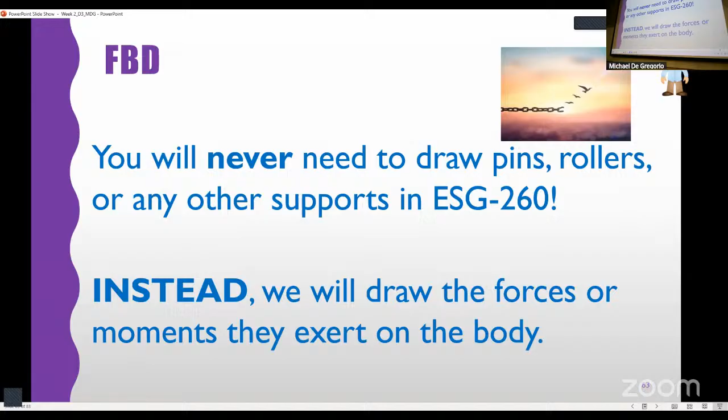So you will never draw pins or rollers or any other types of supports in this class. You will only draw the forces, or the moments, that they exert on the body that we are interested in, in the system that we're interested in analyzing.

So in this case, I've got 2 smooth pipes, each having a mass of 300 kilograms, supported by the tines of the loader's fork attachment. If we want to determine all the reaction forces, what do we have? We've got some force here pushing up off of the base of the tines, which they've called T, and we've got these normal forces from here. And those come into play when we remove this.

Why? Because you have to pretend you took away what is supporting them, right? But those are typically the quantities that we are interested in. We want to know specifically, is this forklift going to be able to support the load that we have put on it? And in order to know that, we'll talk more about bending and all that stuff.

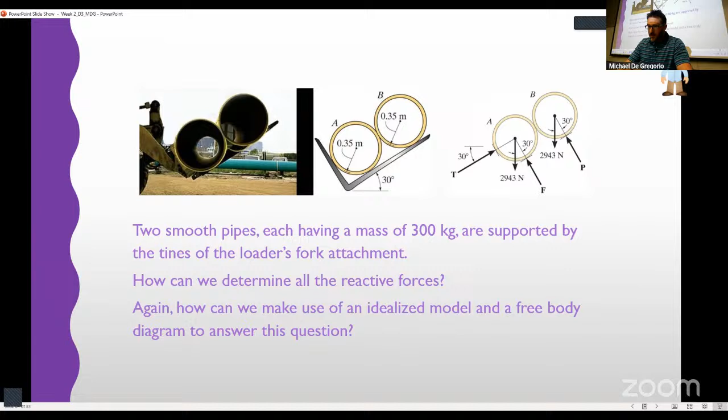So how do we make use of an idealized model and a free body diagram? Well, we'll find out, right? But conditions for particle versus rigid body, we talked a little bit about this at the beginning of class.

Here's a particle, here's a rigid body. Notice, everything passes through the center here. Not everything passes through the center here, right? So for a rigid body to be in equilibrium, the net force as well as the net moment about any arbitrary point, which we're going to call O, must be equal to 0. So the great thing is that you can take the moment wherever you like, it doesn't matter, any point O.

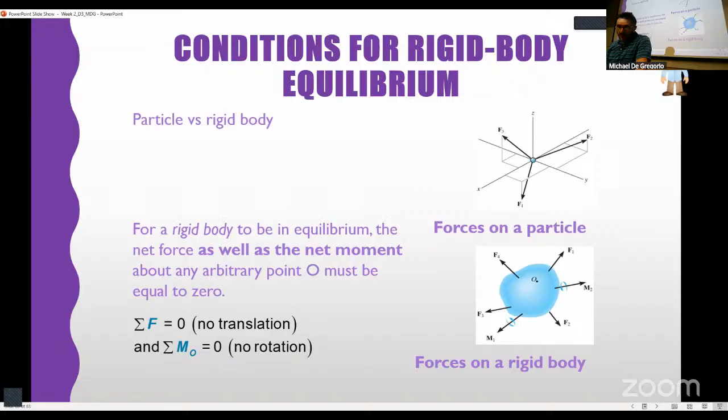Some points are better than others. We'll talk a little bit more about that as we get closer, probably next week. But sum of the forces equals 0, that one makes sense, right?

So what do we have to do? We start with our actual physical system and we create an idealized model. Assume negligible friction, assume we have weightless, massless, frictionless pulleys, no wind resistance, all that stuff, right? And then we draw a free body diagram showing all of our external active and reactive forces, every force that is acting on there, and then we apply our equations of equilibrium.

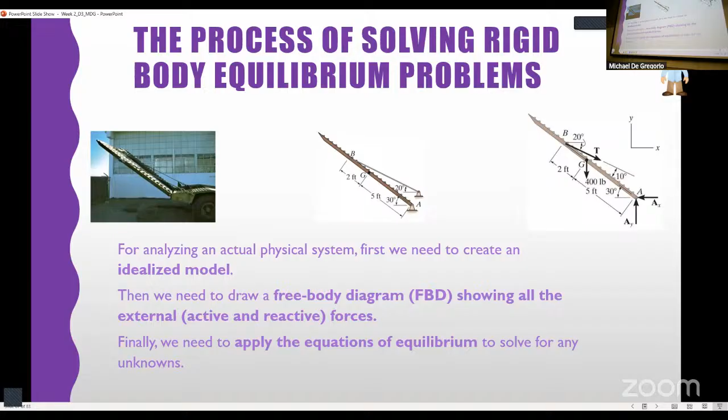Sum of forces in the x and y direction, sum of the moment, doesn't matter which ones. This is a fun fact: you can actually take 3 moment equations and not even need to use sum of the forces if you don't want to. I don't necessarily recommend that all the time, but there are certain instances where that might be helpful.